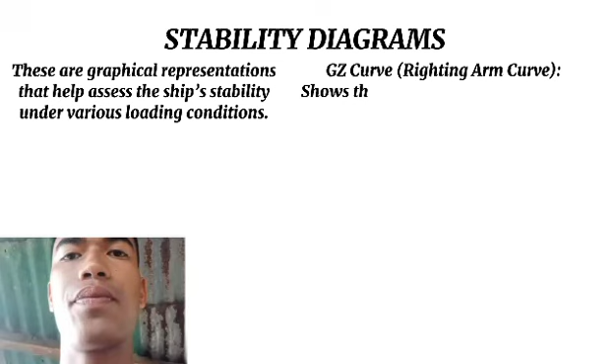Stability diagrams. These are graphical representations that help assess the ship stability under various loading conditions. GZ curve, righting arm curve: shows the righting arm GZ versus the angle of ship heel, essential for understanding how the ship will behave when heeled due to external force.

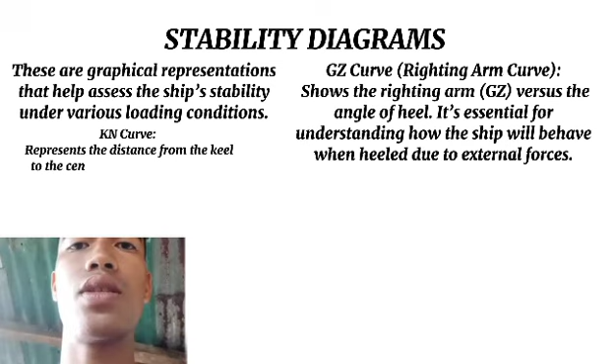KN curve represents the distance from the keel to the center of buoyancy, KN as a function of heel angle. Used to calculate GZ using the formula: GZ equals KN times sin heel angle minus KG times sin heel angle.

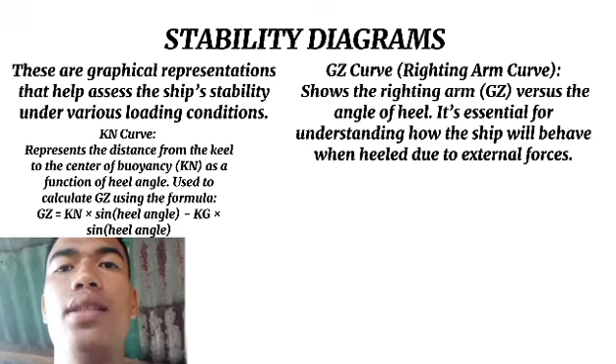Cross curves of stability. Show the righting arm GZ at various angles of heel for the different displacements. Help predict stability for different loading conditions.

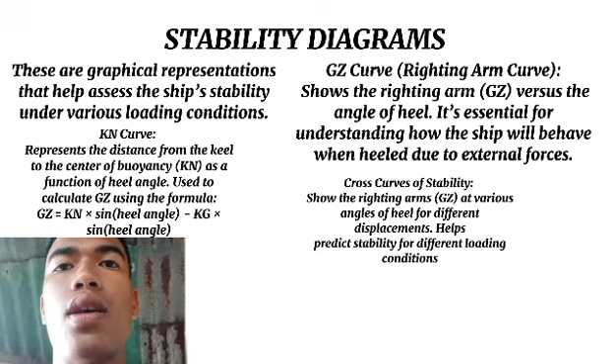Hydrostatic curves provide data such as displacement, draft, trim, BM, metacentric height, and wetted surface area for various drafts.

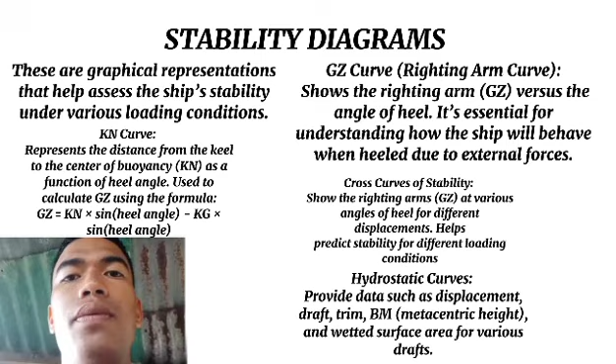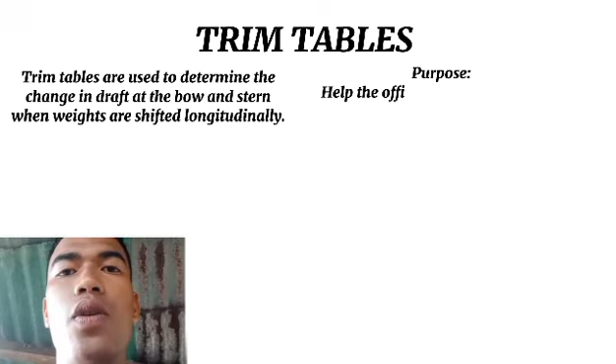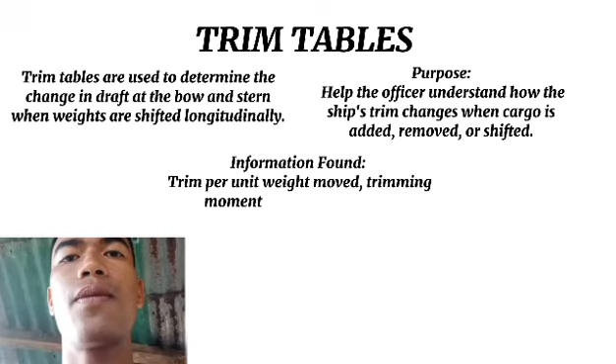Trim tables. Trim tables are used to determine the change in draft at the bow and the stern when weights are shifted longitudinally. Purpose: help the officer understand how the trim changes when cargo is added or removed from the ship. Information found: trim per unit weight moved, trimming moment, draft change, etc.

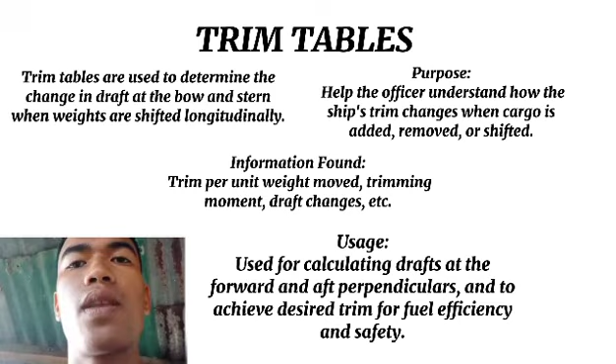Usage: used in calculating draft at the forward and aft perpendiculars and to achieve desired trim for fuel efficiency and safety.

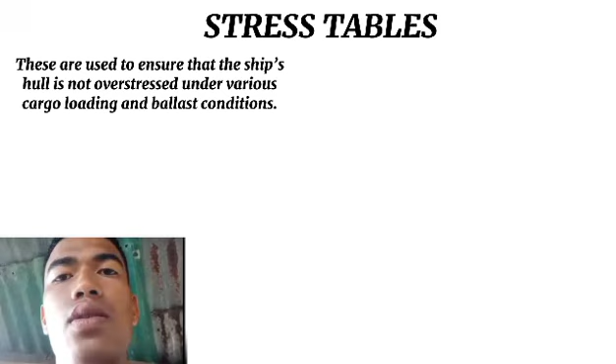Number 3. Stress tables. These are used to ensure the ship hull is not overstressed under various cargo loading and ballast conditions. Bending moment and shear force tables: graphs show allowed and actual values along the ship's length.

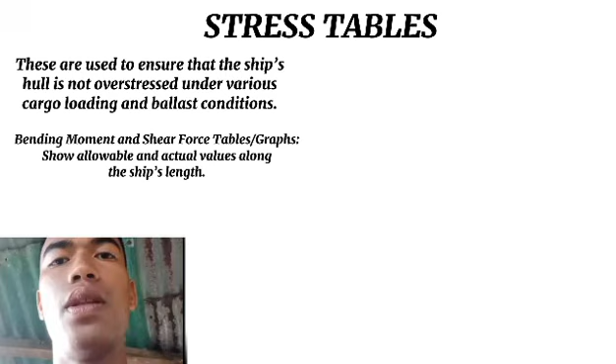Longitudinal strength booklet includes data for bending moment and shear force at specific frames. Usage: helps ensure the cargo loading stays within the structural limits of the ship.

Onboard tools and systems. Modern ships often use loading computer systems or stability software, which integrate the above diagrams and tables for real-time assessment and simulation.